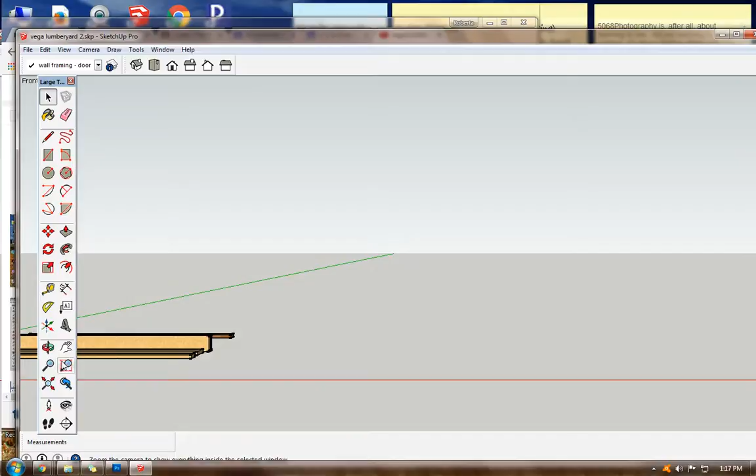We're going to begin in our lumberyard document. You have some elements there that you created for other parts of our ranch house. We're going to create a new layer here. By clicking on the plus sign, I'm going to type in wall framing, and add the word door, just because that's what we're working on now. I'll click here to make that active.

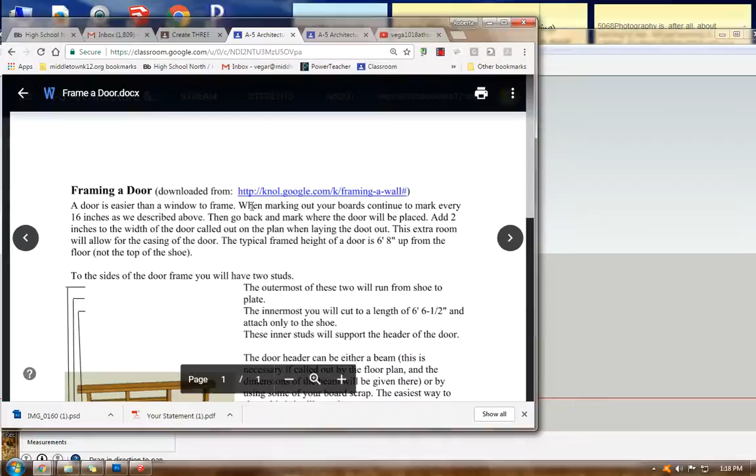Now in our Google Classroom, we want to go to the instructions, Ranch House Step 6, Frame Wall Elements, and I'm going to click on the document for Frame a Door. When you click on that, you get this document here, Framing a Door, and this is what we're going to be creating. So we're going to go into our SketchUp document, and we're going to go to Top View.

In Top View, we're going to create some lumber. We're going to start with a board that is 12 feet long. Notice my dimensions down here: 12 feet long, comma, 12 feet, comma, 6 inches wide. Enter. And then I'm going to take that and make it a component, and I'm going to call it door sole plate.

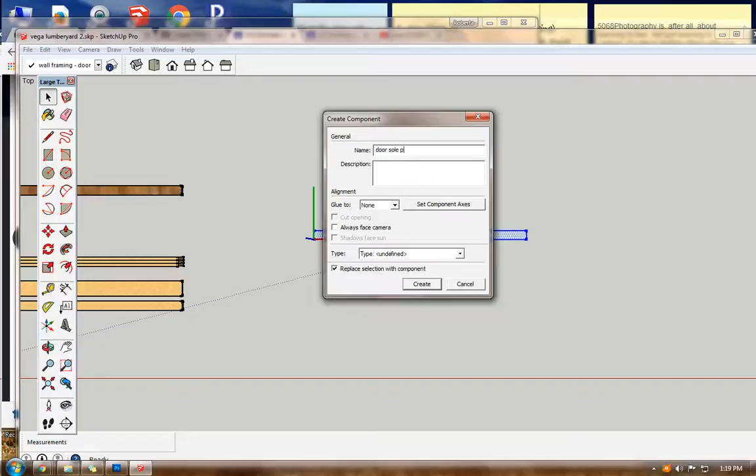And then I'm going to double click on that and give it some wood color, and I'm going to use the push-pull extrude tool to pull it up 2 inches. So now I have a piece of lumber that's 2 inches thick, 6 inches wide, and 12 feet long.

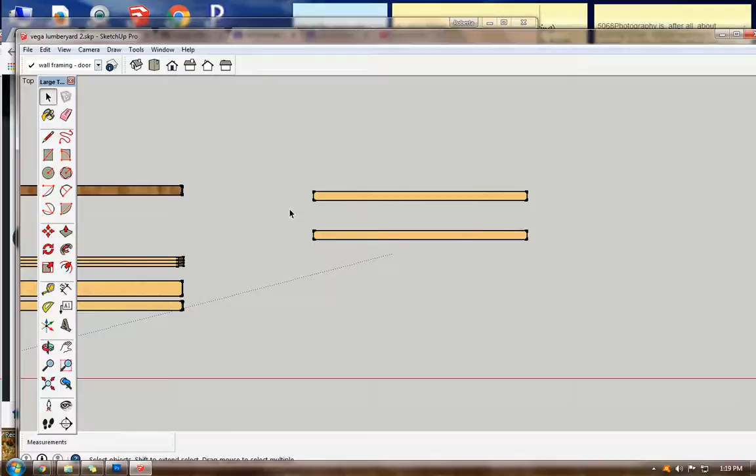I need to create vertical members. I'm going to use Control and Move to make a copy of this. And then I'm going to take this copy and go to Edit, Solid Component, Make Unique.

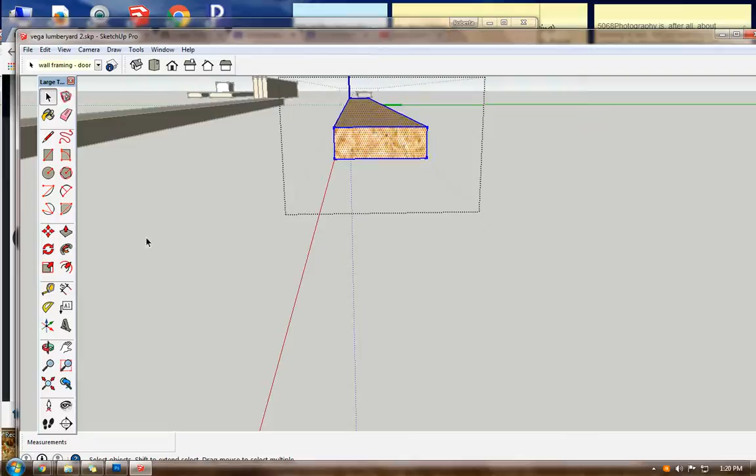This one I need to make shorter, because my walls are only 10 feet high. So I'm going to go in here, go to the end. This was 12 feet long. I'm going to push it forward 2 feet, and then click out here.

I can check my dimensions and make sure that that's correct by using my dimension tool over here. Click on one end and on the other end and pull it out, and I can see that it is 10 feet long, which is what I need.

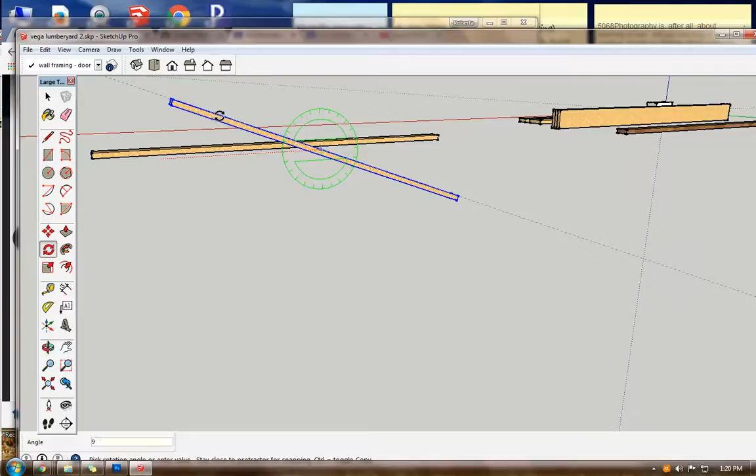All right, so now I'm going to take that component and rotate it so that it stands up. So I'm going to rotate it 90 degrees, typing in 90, and I'm going to move this so that it sits right on the end of my sole plate.

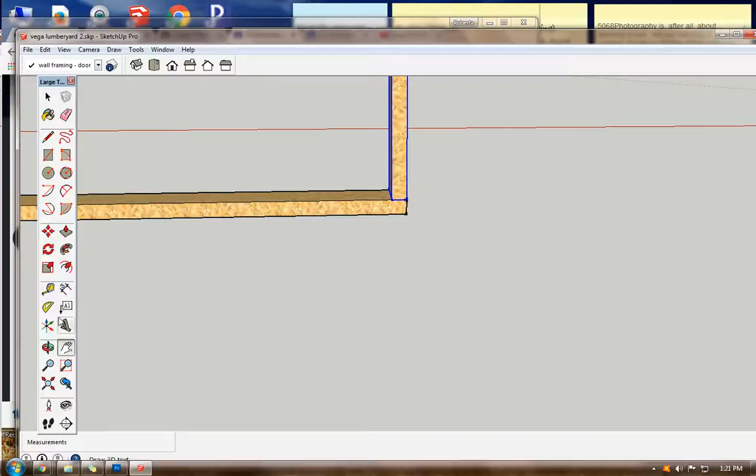Now, when you're framing wall members, that's very similar to framing the floor platform. The vertical joists are 16 inches apart from the center of one joist to the center of the next one. So I'm going to use Control Move to move a copy. I'm going to type in 16 inches. Now, to make sure it's 16 inches from center to center, the space in between should be 14 inches.

How do we get that? From the center to this edge is 1 inch. This would be 14. 14 plus 1 is 15. And then from here to the center of this would be 16 inches.

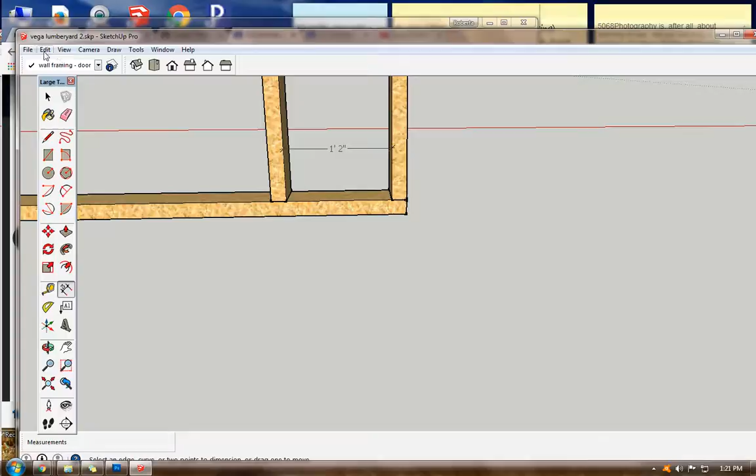Let's just check to make sure that the space is 14 inches. Using the dimension tool, click here and there, and we see 1 foot 2 inches, which is 14 inches. So that's how we would get that correctly spaced.

So I'm going to control move a copy alongside, right alongside, so it's only 2 inches. And I need to make this unique because this is going to be shorter. How much shorter? We're going to find out in a minute. But let's make this unique first. Okay, so that is our jack stud.

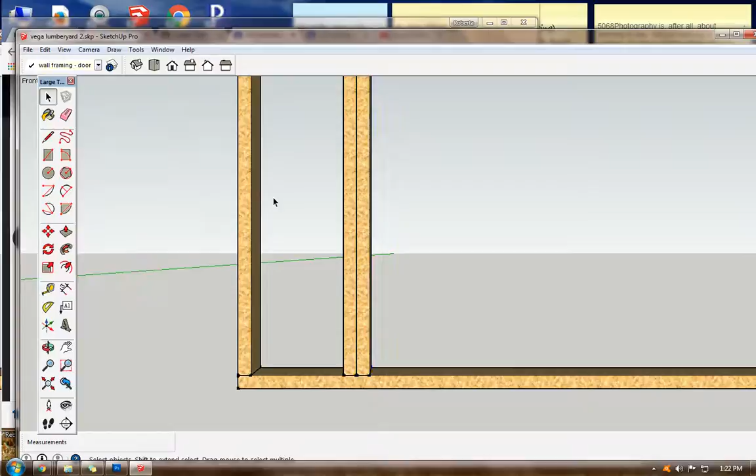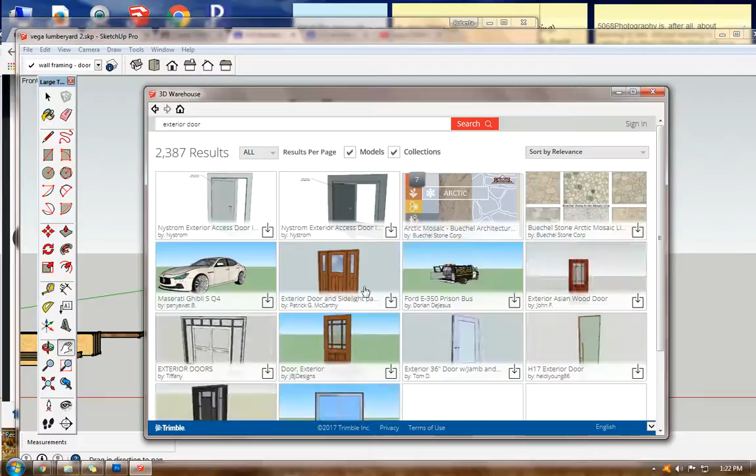Now let's go to the 3D warehouse and get an actual door model. Let's type exterior door. Search. And we want something that's relatively simple, so it's not going to take up a lot of file space.

Let's take this nice little fan light door, is kind of nice. Download it directly into my model, yes. I'm going to put it over here.

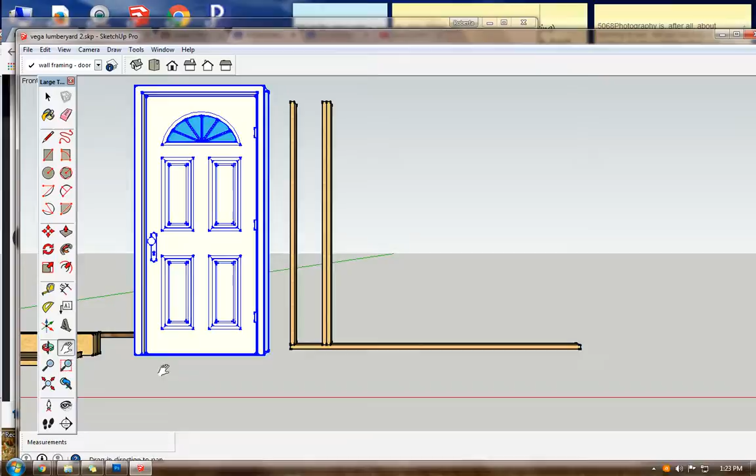I need to know the dimensions so that I'll know how big to make the spaces in my model. So take my dimension tool, click on the bottom and on the top, pull out, and I see the height is 7 feet 3 inches. Now let's dimension the width, this side to that side, pull up, and the width is 3 feet 6 inches.

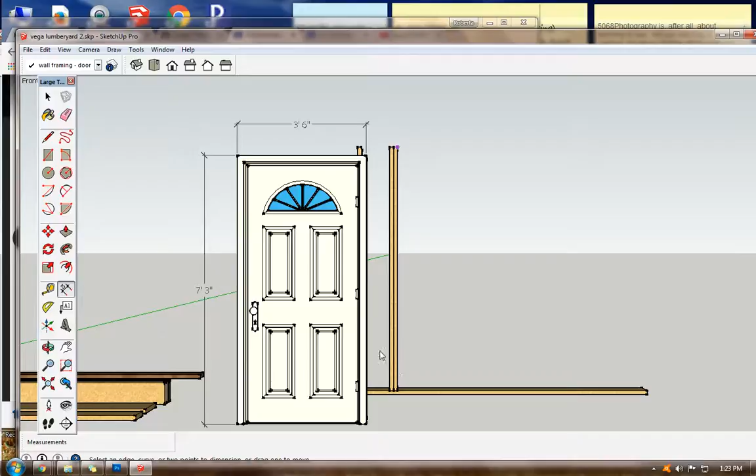All right, so my jack stud here needs to be 7 feet 3 inches. I'm going to click on that jack stud to make it active.

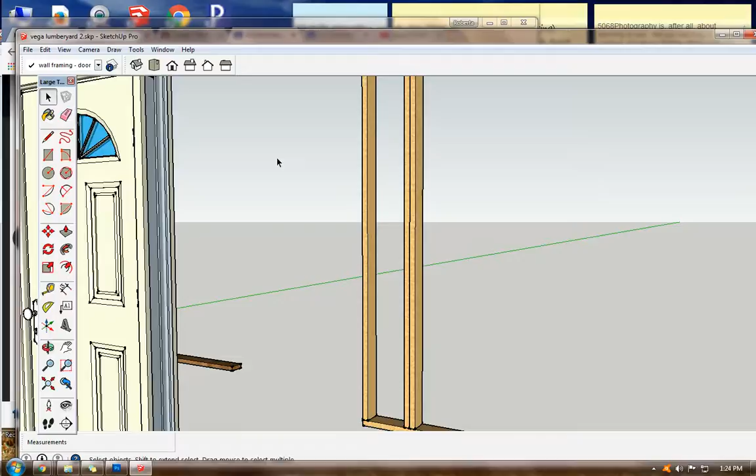Needs to be 7 feet 3 inches. Let's do the shortcut on the math: 10 feet minus 3 feet is 7 feet, so we'll take it down 3 feet, then take it up. Now what's left is 7 feet, so we'll take it up 3 inches. Now our jack stud will be 7 feet 3 inches high.

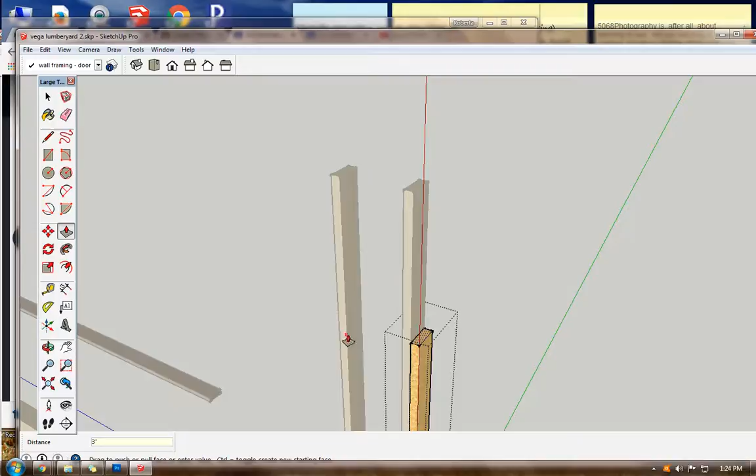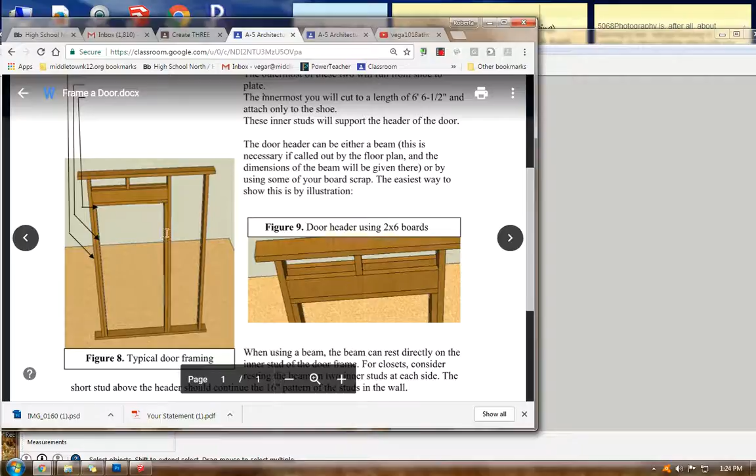Now, according to our diagram, we need another jack stud on the other side of the door. Our door is 3 feet 6 inches. Let's take that jack stud and move it, control move a copy over. Start to move it and type in 3 feet 6 inches, no comma in between because we're only moving in one direction.

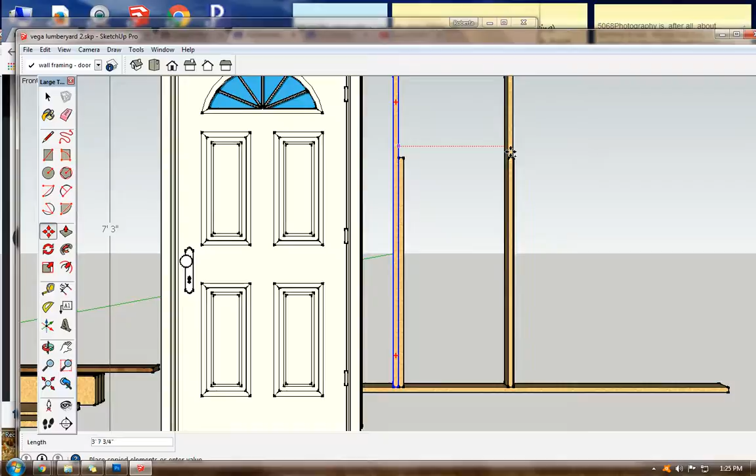Now I want to take the king stud and copy that, control move. We're going to move that right to the other side of our jack stud, making sure it's sitting right alongside of our jack stud with no space in between. Good.

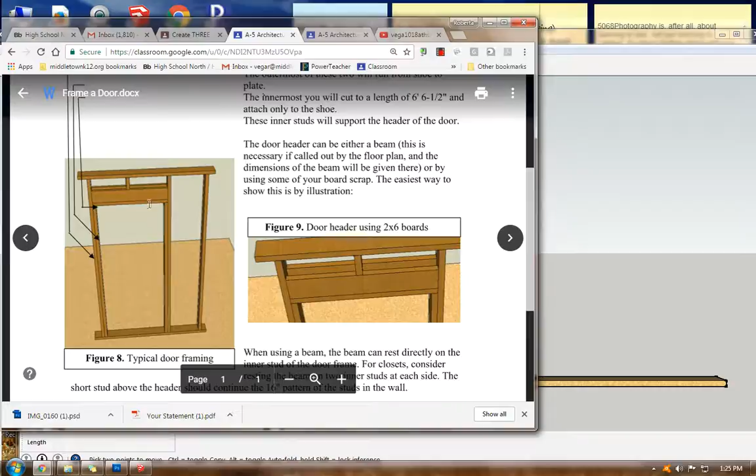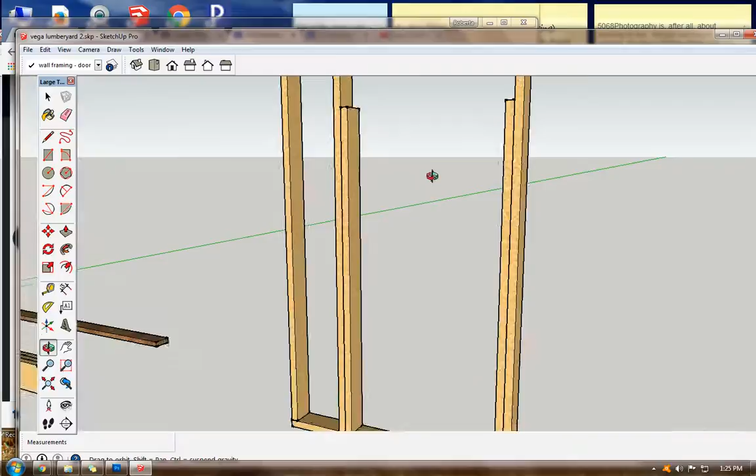Now, according to our diagram, we also need some header pieces. We're going to take one of our jack studs and... no, I changed my mind, there's an easier way. We're going to use our orbit tool and zoom into the space above one of our jack studs, and draw a rectangle above it that is 2 inches by 6 inches.

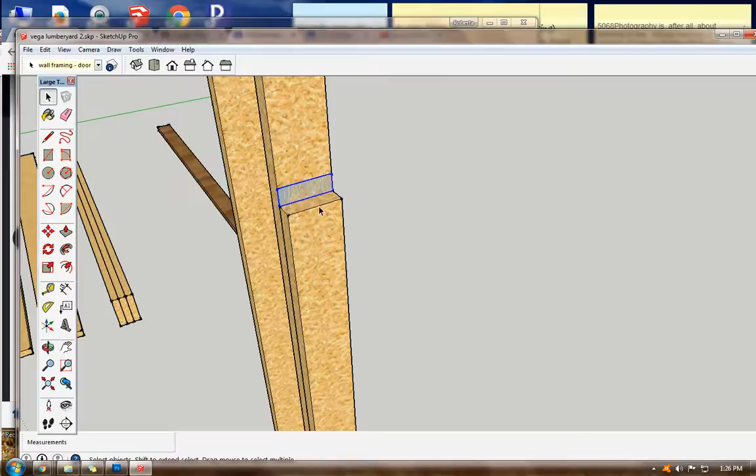2 inches, comma, 6 inches, enter. And we will make that a component. I'm just going to call it H1 for one of the first parts of my header. I'm going to leave this white, but I'm going to pull this using the push-pull all the way across my space, which is 3 feet 6 inches, no comma.

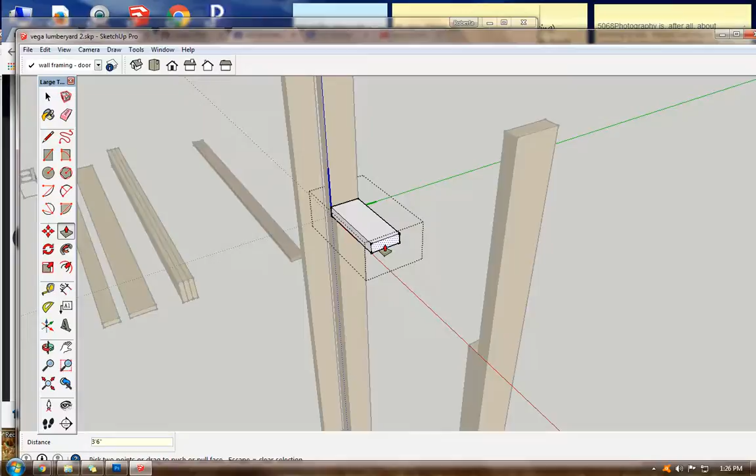That's the distance in between. I needed to make it a little bit more because I need to allow for the space of the other jack stud, so that's another 2 inches.

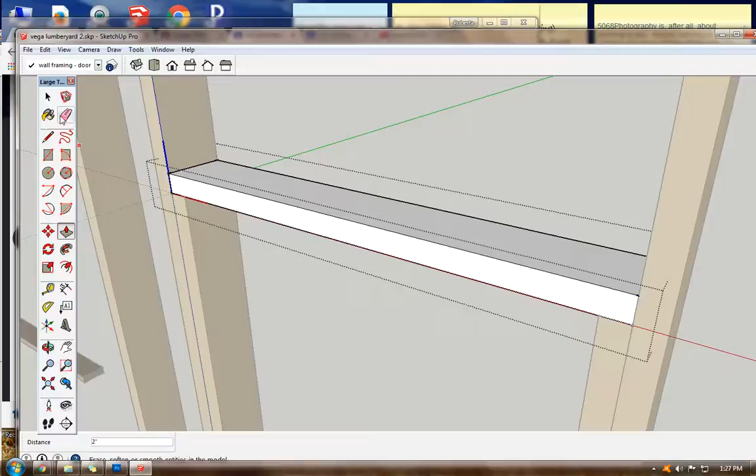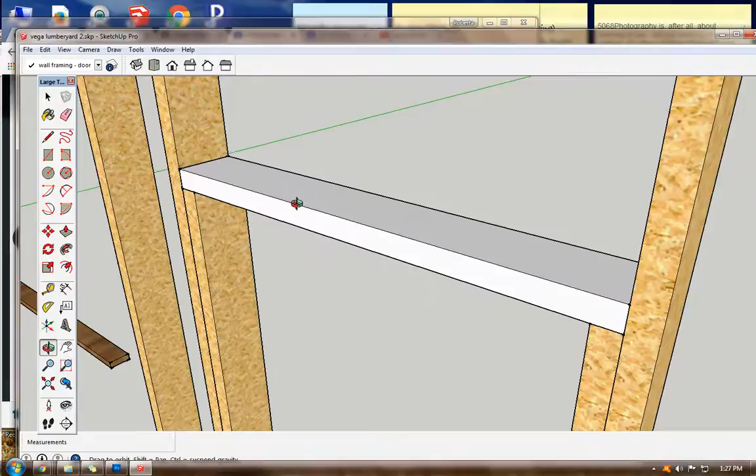Now, I'm going to again follow the diagram. I need 2 vertical boards. These vertical boards are also 6 inches, but they're standing up instead of laying down. So I'm going to again draw a rectangle over here, and I will make it 6 inches, comma, 2 inches, enter. I'll make that a component, and I'll call this H2.

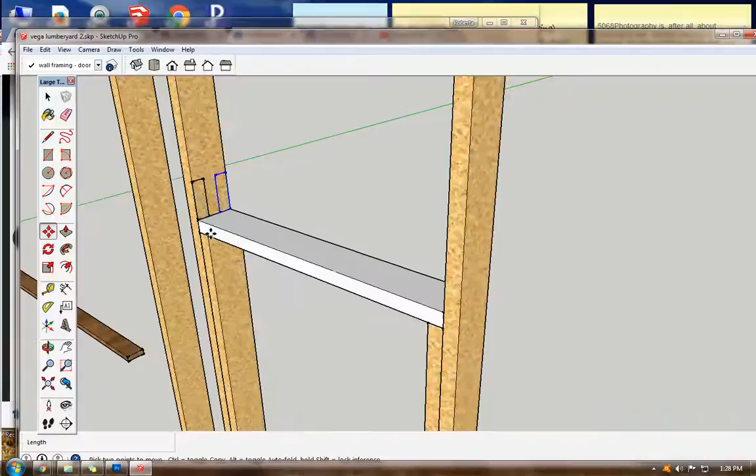And I'm going to need, according to my diagram, 2 of those. So I'm going to control move a copy of that right to the other side now, and put it so that it's exactly sitting there. Then I need to pull those 2 all the way across, and that should be 3 feet 8 inches. So let's open our components by double clicking them and pull them across 3 feet 8 inches.

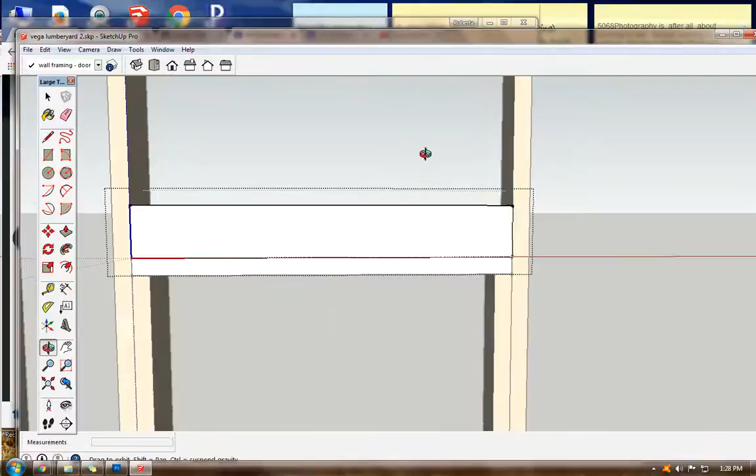And that part works. Now, for the rest of my door, I need a top plate. My top plate needs to be double. That's very easy to do. Let me just move this door out of the way for a little bit. I'm going to take my sole plate and control move a copy straight up so it will sit on top, and it will be 10 feet up, and 10 feet 2 inches, sorry, 10 feet 2 inches.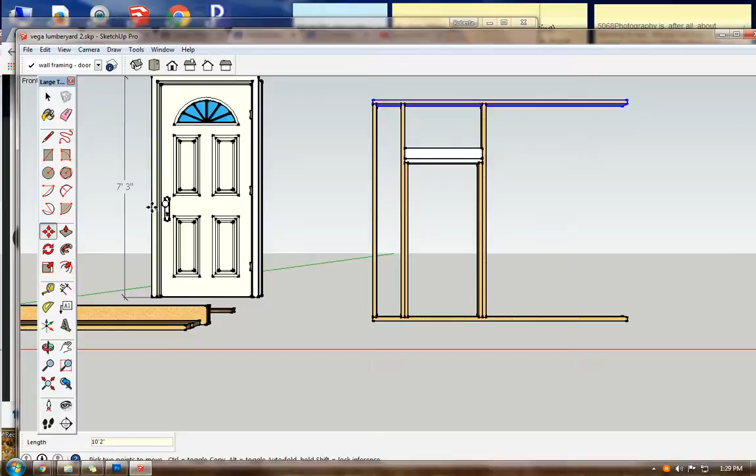I have to allow for the thickness of the sole plate. And then it needs to be double, so I need one right above that, control move, and this one's only 2 inches above.

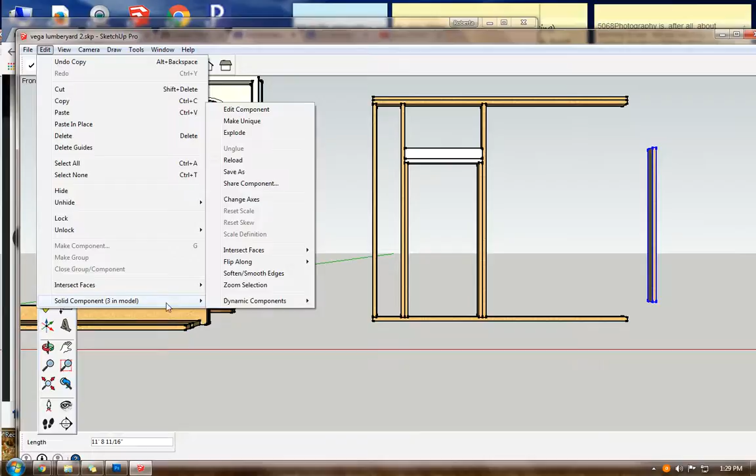Now, the last part of the door framing is to add some support in this space. So I'm going to take one of my jack studs over here. I'm going to control move a copy out into this space. I'm going to make it unique because I need to cut it short. I'll take that, and now that it's unique, I'll move it over here and set it right alongside of the king stud on top of those horizontal members that I just drew.

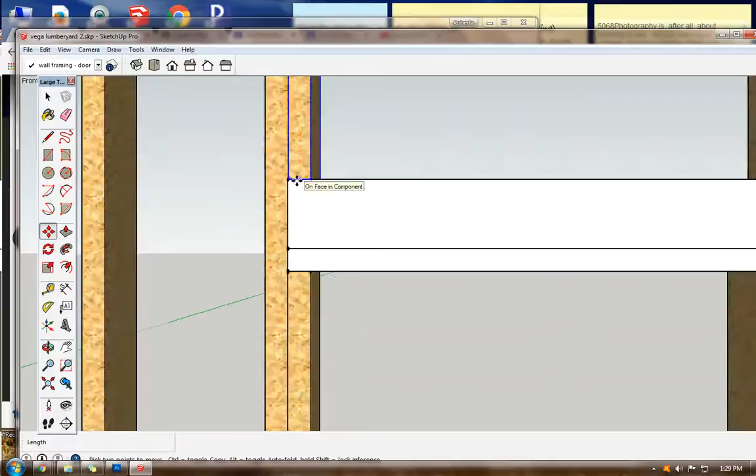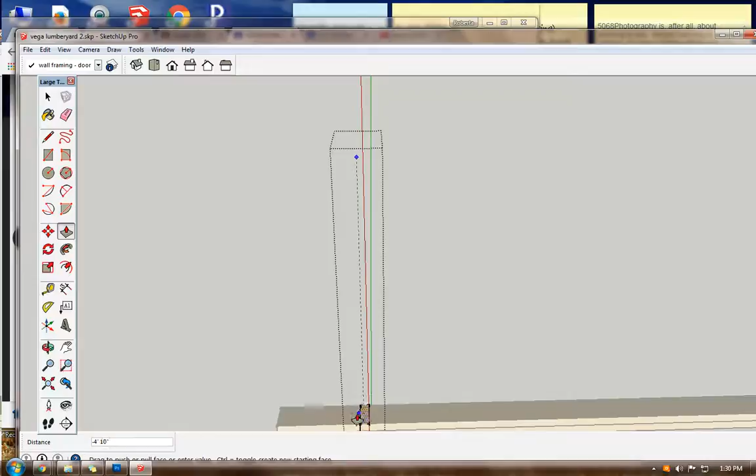Now, since this is unique, I can go to the top of this and use my push-pull or extrude tool to pull this down so that it fits level here first, and then down another 2 inches so that it just touches the bottom, I'm sorry, 4 inches, so it just touches the bottom of that upper top board.

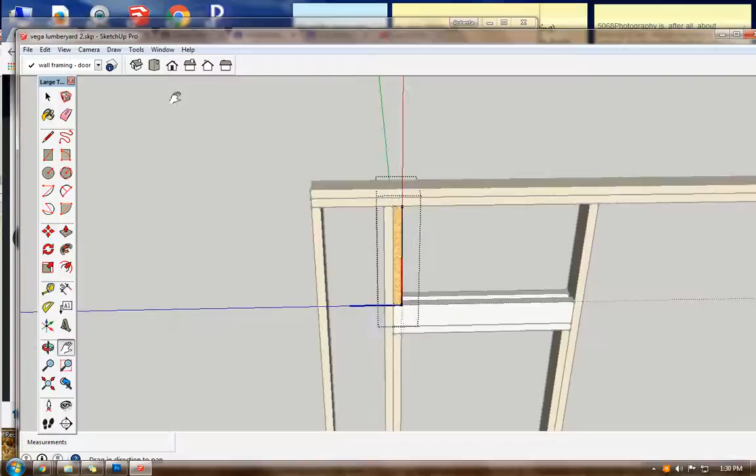Now, the framing is similar to what we've done before. We need to move this so that it's 16 inches on center from the one here, which would be 14 inches away. I'm just going to start to move this over and type in 14 inches and control move a copy, and that's 16 inches on center also.

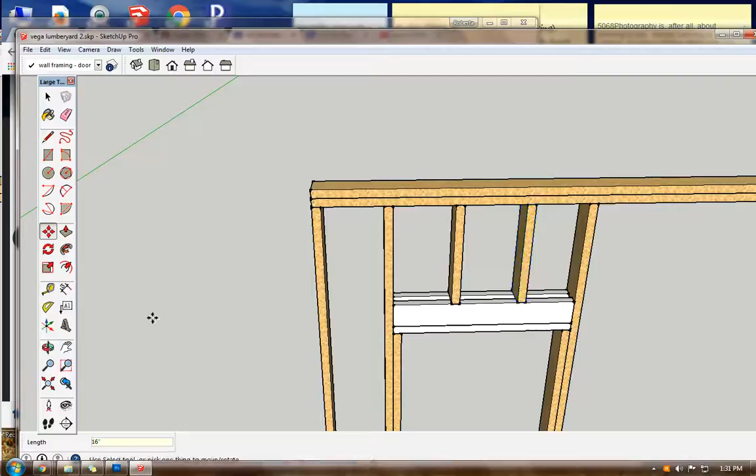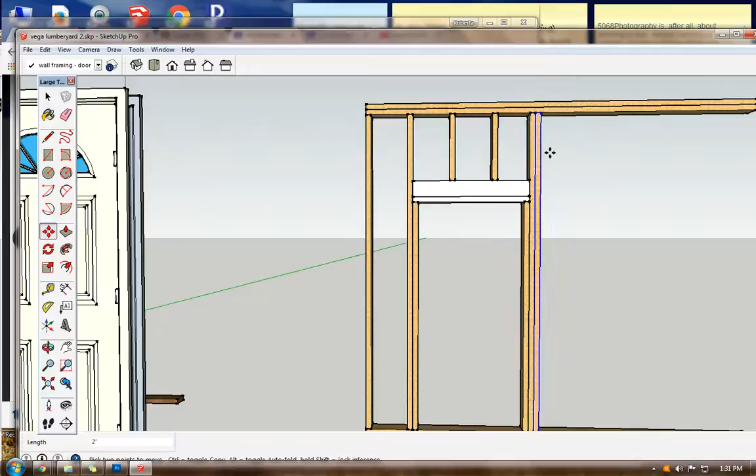So I have my framing elements ready. I'm just going to add one more wall joist over here by control move and type in 16 inches. I'm not going to fill in this space here because I'll fill those in with either wall joists or maybe a window, depending on how my house is laid out.

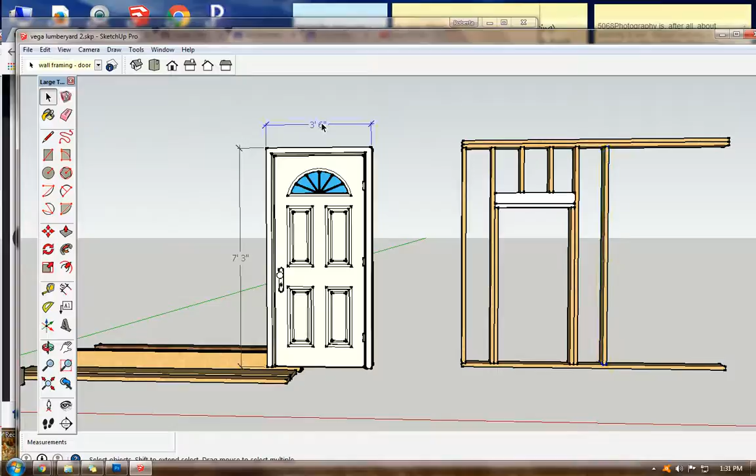This concludes the tutorial on how to create an opening for a door. Now we can just take our door and get rid of dimensions here by clicking on them and hitting delete. We can move our door into our space just to test it.

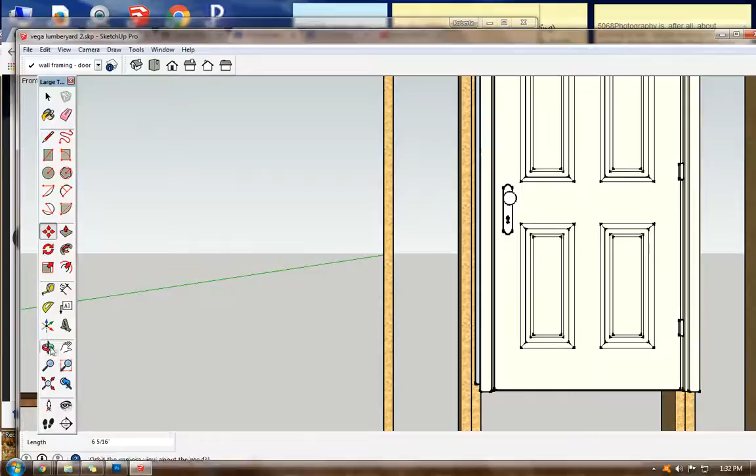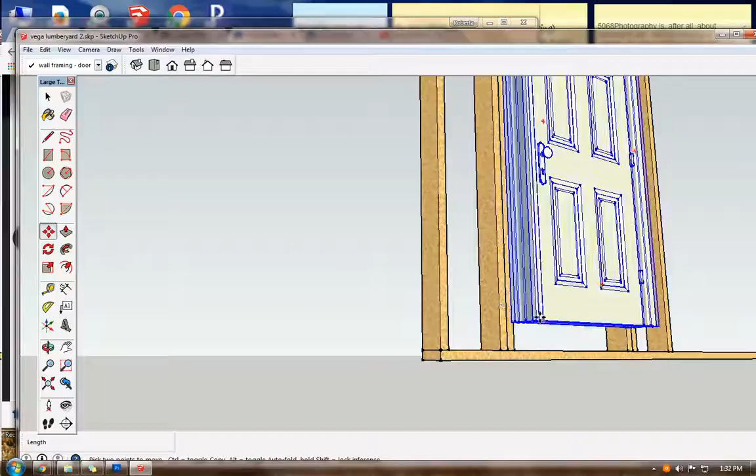And it just takes a little bit of maneuvering around SketchUp to move things into position. But this should just fit our space very well.

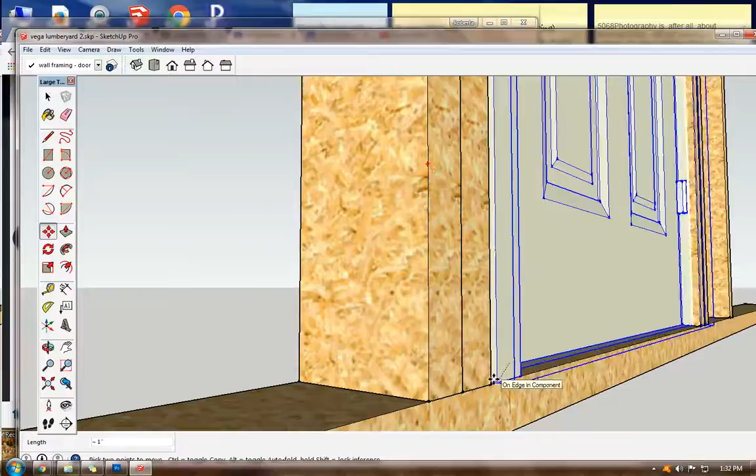Okay, so let's orbit around. Fits in the back, fits in the front, fits on the sides. So it's a pretty tight fit in there. And that is it.